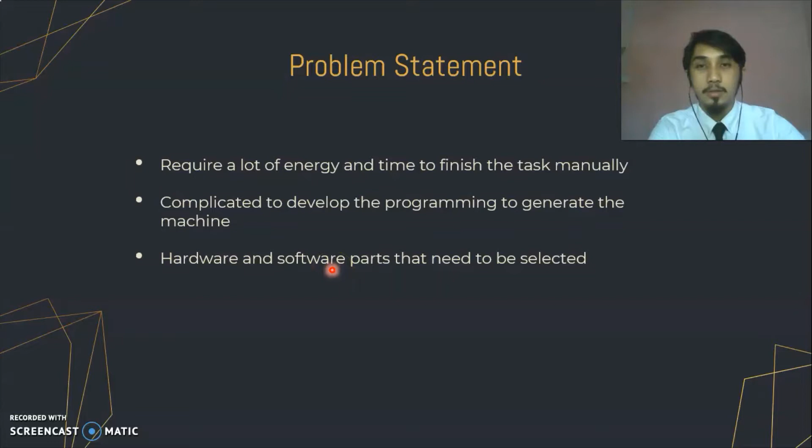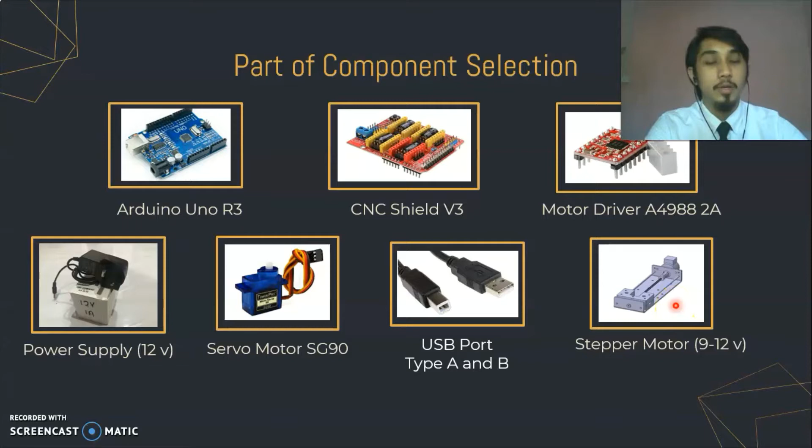And the last one, the stepper motor that I use is 9 to 12 volt and is used to make the movement of the X and Y axes.

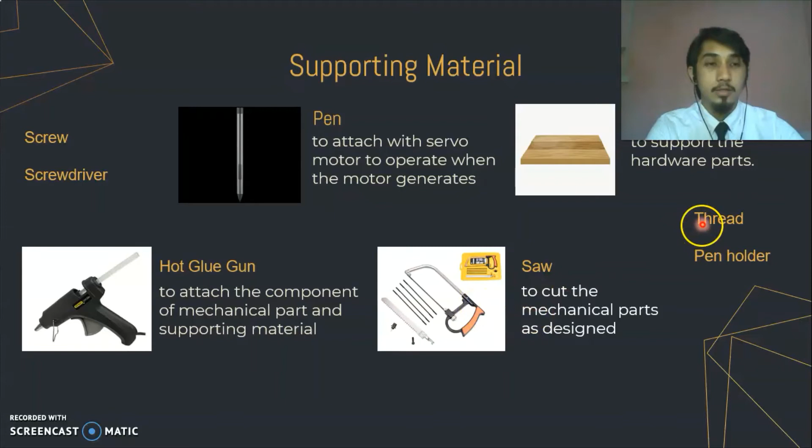and then to attach the wooden and other mechanical parts, I will use a hot glue gun. Also, I will use a saw to cut the mechanical parts that I use in the design. Then a thread pen holder.

Okay, the software to develop the system consists of 3 software. First, Arduino. The Arduino IDE is the software that can code to program the mechanical parts. This is the main software that works together with other software such as Inkscape and G-code processing.

Inkscape is used to draw or write anything in the software in graphic format, and it can be saved into a G-code file. And the last one is G-code processing. This will be used to import a G-code file from Inkscape and to generate and make the movement of the mechanical handwriting machine.

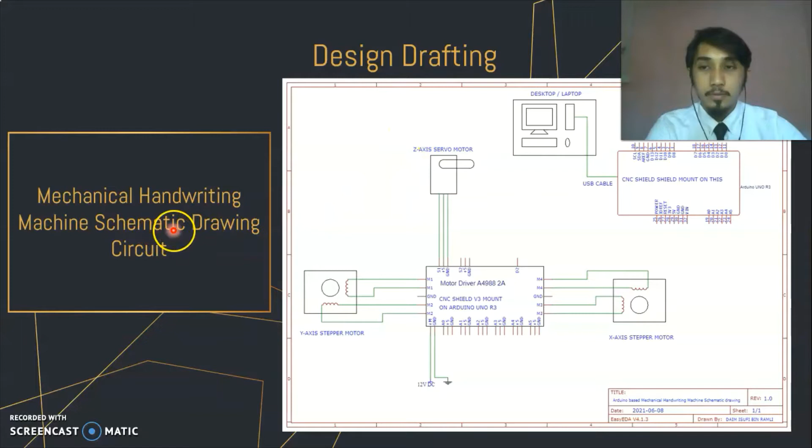Okay, this is the design drafting that I have drawn. This is the circuit. First, as you can see here, the CNC shield will be mounted on the Arduino Uno together with the motor drivers. I use 2 motor drivers here and heatsinks also.

Then here it will be divided into 3 axes: first, the Z axis with servo motor, the Y axis stepper motor, and also the X axis stepper motor. So together I will use 2 stepper motors and 2 motor drivers. As you can see here, the CNC shield mounted with the Arduino Uno will be connected via USB to the laptop, and also connected with 12 V DC.

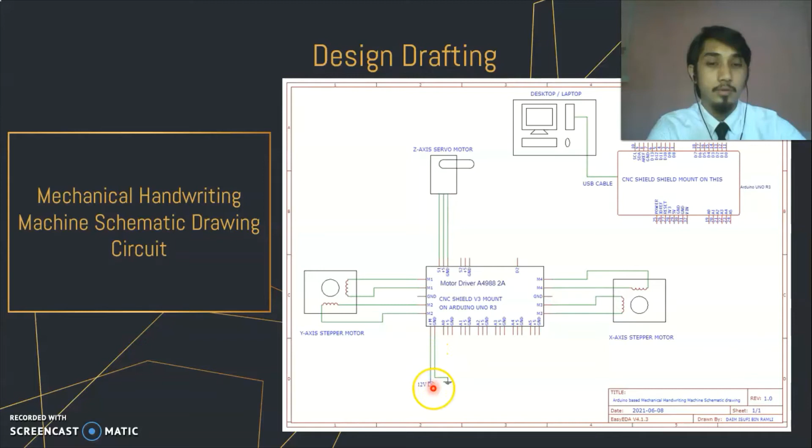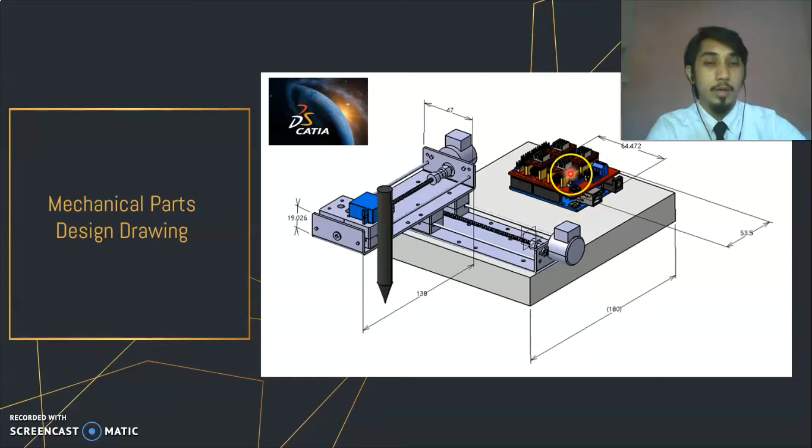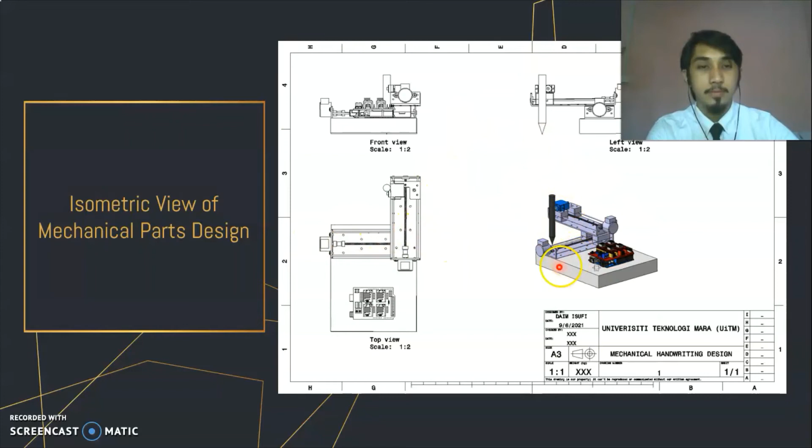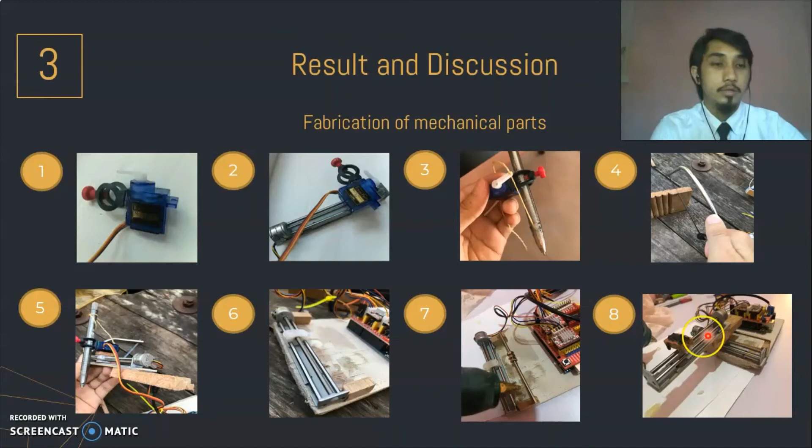And also, to make it more stable and not easy to move, I put the rubber tube. And this is the final product of my mechanical handwriting machine. And then for the programming parts, this is the coding of the Arduino software, which is the coding that must be included to generate the programming parts, such as limit, G-code, setting, stepper, and this is one example of this list for the stepper.

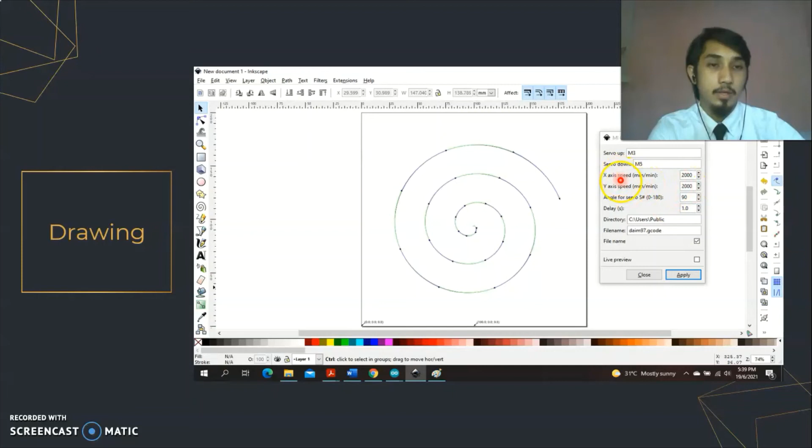And this is the most important part in Arduino coding, which is the X, Y, and Z axis setting. This is very important to travel 10 cm if the G-code requires 10 cm. And furthermore, this setting is also very important to get the limit, step, max rate, acceleration, and max travel. Then this is the Inkscape software. This is the drawing that I have drawn, and as you can see here is the path of the drawing, and it can be set for axis speed, X, Y, and also for the servo.

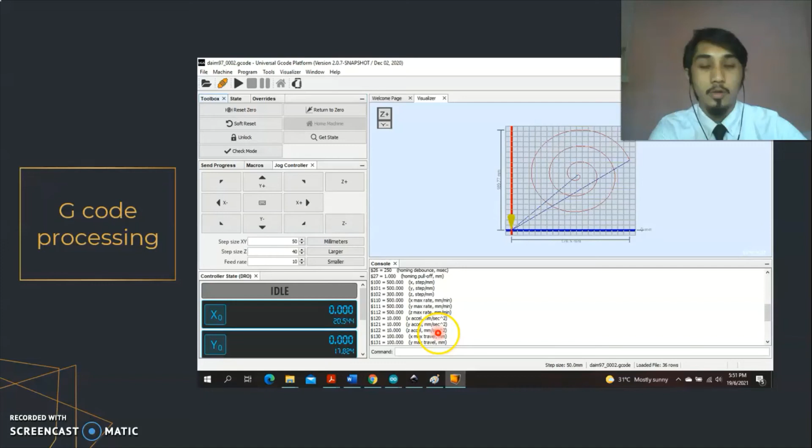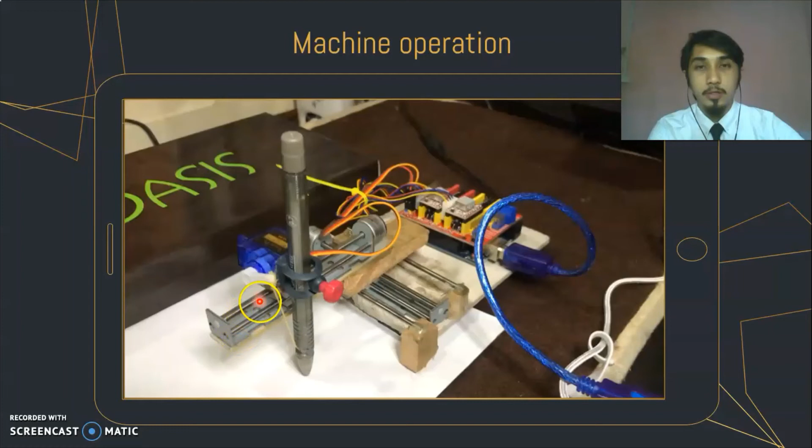And the last one is G-code processing. After I save the drawing from Inkscape, it will be imported here to create the image and to make the movement of the mechanical handwriting machine. And the setting of the Arduino will fit here. This is the video of my mechanical handwriting machine. Okay, this is the product of my project, and it is already connected to the laptop.

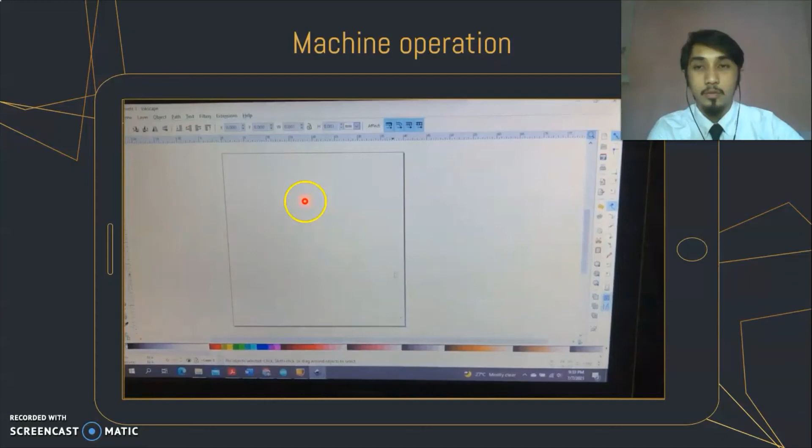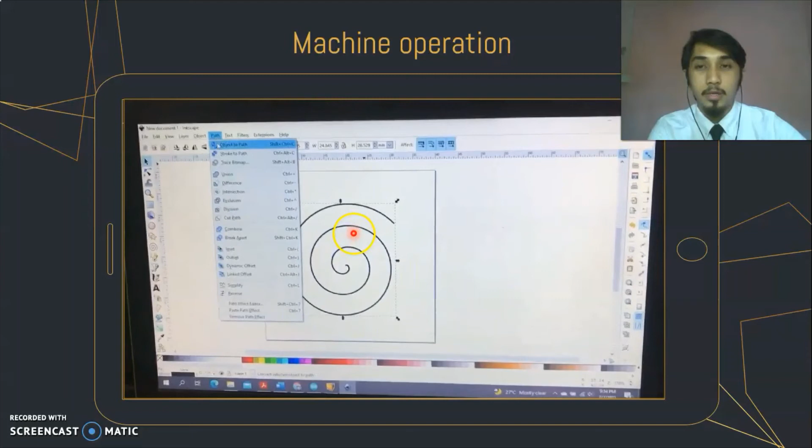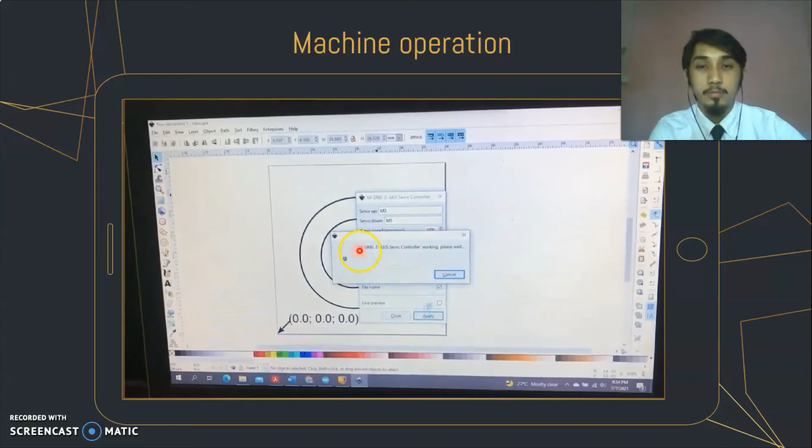First, I will open Arduino Uno, and then we open Inkscape. In Inkscape, I can draw anything here, and this is a drawing that I have drawn and recorded, the circle that I have drawn, and this picture must be in path so that it will know where to start and end the drawing. And then I will save this file in G-code so that it can be exported to G-code processing. And this is the path.

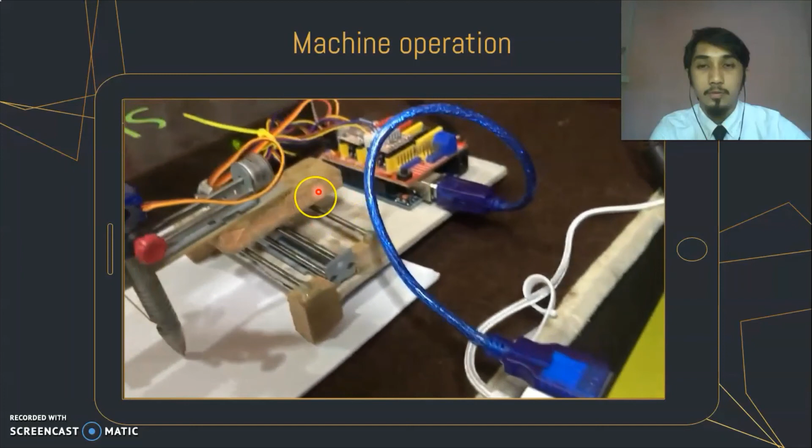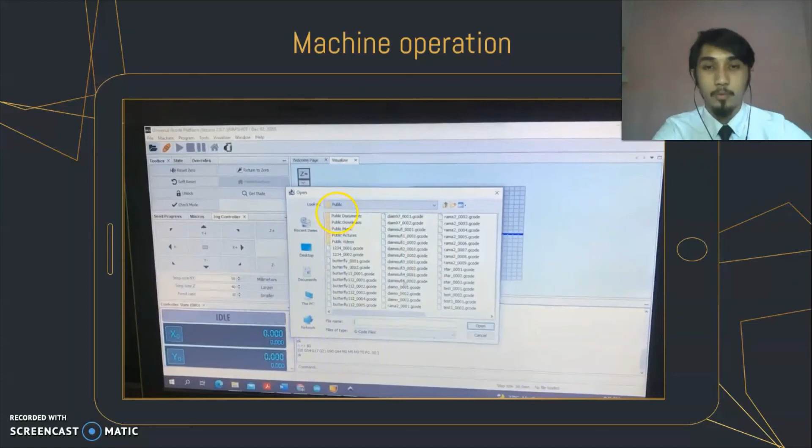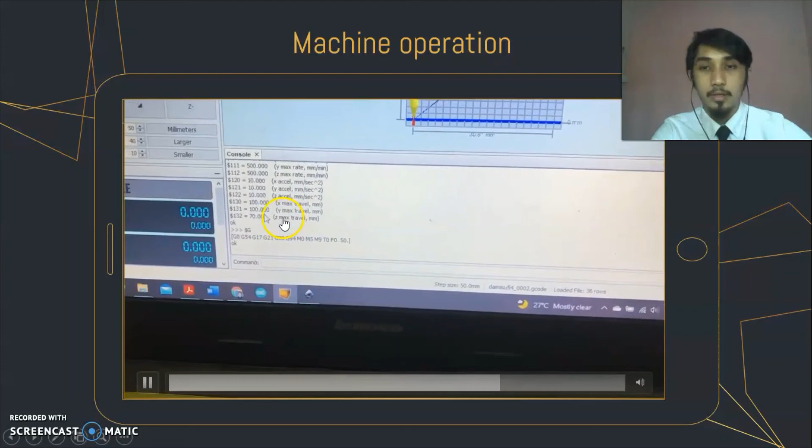And this is the G-code processing. And I have already connected it with the mechanical handwriting machine. And then I will import the file that I saved from Inkscape. And here, as you can see, is the drawing from Inkscape, and this is the setting that I have set from Arduino Uno, and it appears here to generate the G-code processing, and then just click start to run this machine.

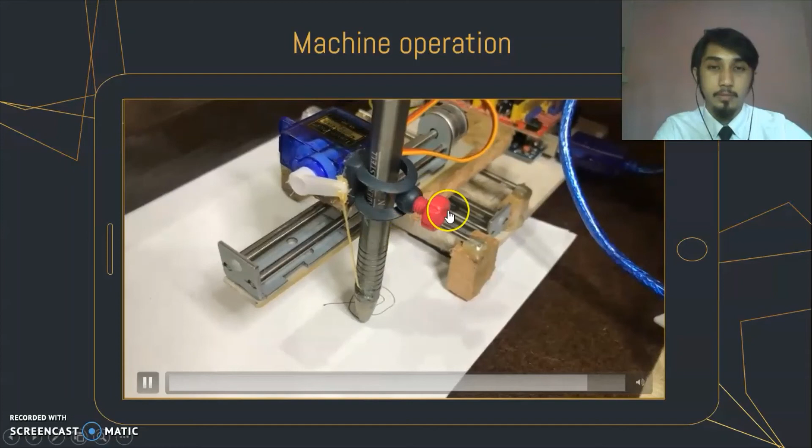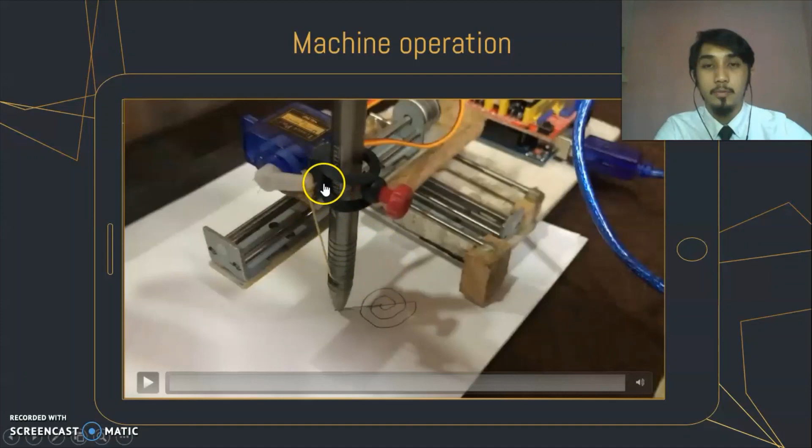And this is the result of my product. As you can see here, the X-axis and Y-axis move with better performance, but the servo motor does not move properly. Actually, it should move up when the pen is moving here, so that these two lines will not appear on this paper. And from my point of view, maybe the servo motor is damaged, or the setting is not correct, so this servo motor cannot run properly.

And these are some of the results that I have drawn. As you can see here, the result is quite similar to the drawing from Inkscape, but it is not so accurate because the X and Y axes are not so stable, so it looks like this.

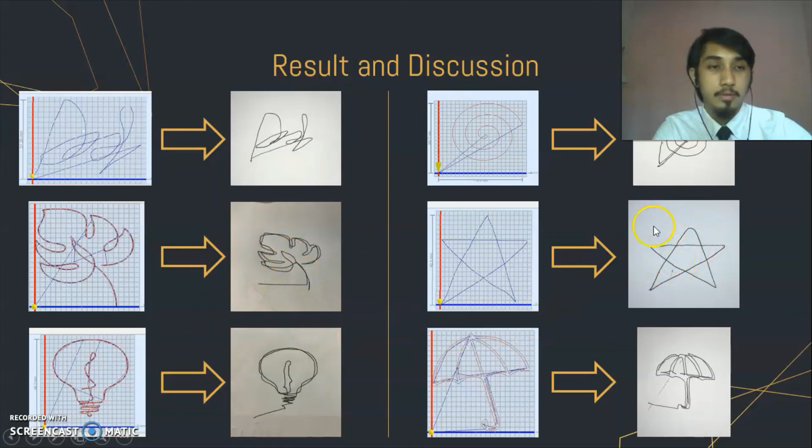Overall, this mechanical handwriting machine is easy to operate and can be fabricated at low cost, and this machine can get better performance if the support material is more intact and stronger, so that the mechanical parts can be more stable and balanced. For recommendations, the design can be replaced with a bigger handwriting machine and provide scanners to make it easier to recognize the desired location and space, which can make this machine more efficient to operate, and also a voice sensor can be added to make it more seamless and quicker to operate.

And the last one, to design for quick composition speed like a Xerox machine or printer, then it will be more successful and will have the capacity for more pages in a brief span.